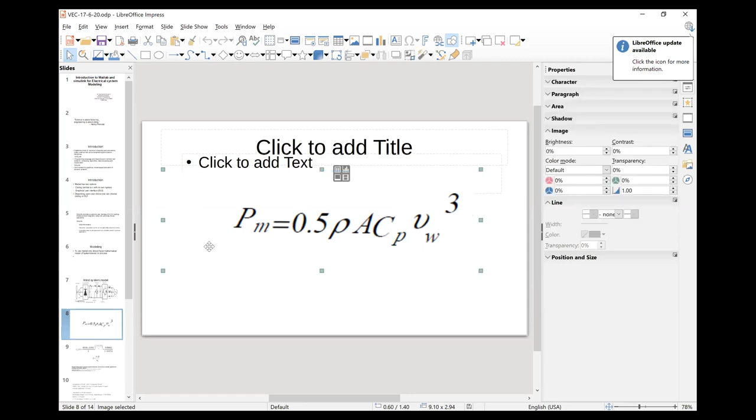See, this is the equation for your wind turbine. The power output from a wind turbine, PM, can be written by this equation: 0.5 rho A Cp Vw cube. Rho is the air density, A is the swept area, Cp is the Betz constant or limit, generally given for a particular wind turbine, and Vw is the wind speed. This equation gives the power output of a particular wind turbine. We need to implement this in MATLAB.

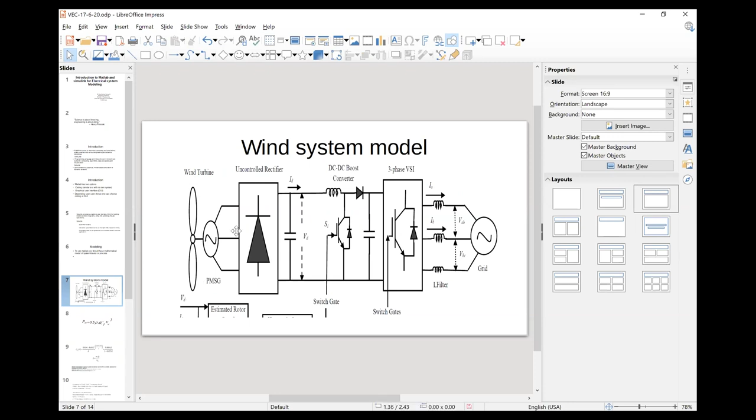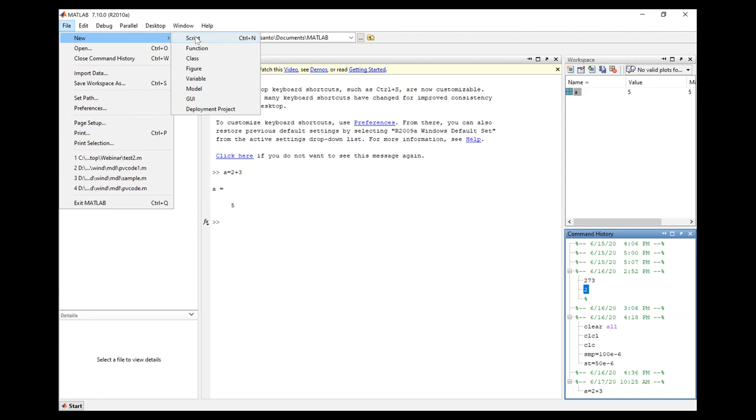Okay. Now I'll just open here. If you go to the MATLAB main window and click File, you can see New Script. There you can write code so that it can be executed. After that, if you open the Simulink browser as I showed you earlier and click on File, or click on this button, you will get a new model. It will open a new window where you can easily implement your model.

Okay. Now it is half rho A V cube. Half is a constant, so you can go to the commonly used blocks. There you can find the constant. Here is the constant. Now rho is also a constant, because for a particular area the air density is common, so that also I will take. You can take it from here, or you can right click with your mouse and drag it, and it becomes a duplicate.

Now half rho A V cube. V cube is a variable, so as of now I am not going to make it a constant. First is the half, so I will make it a constant. I'll take the constant block, double click on it, and you will see the constant value. Make it 0.5. It becomes half.

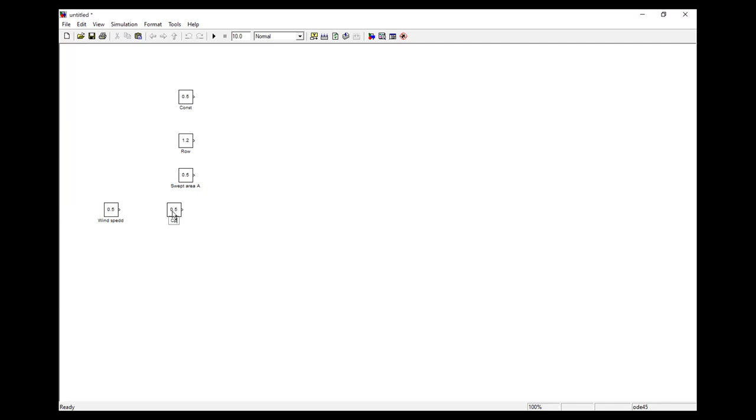Okay, now all these are multiplied. So you can find multiplication here, or you can go directly to the math operations. Either way, generally, if you are using a model frequently, it will be shown in your commonly used blocks. Otherwise, go to the particular tab and you will find all the other options. So math operations, and just try product.

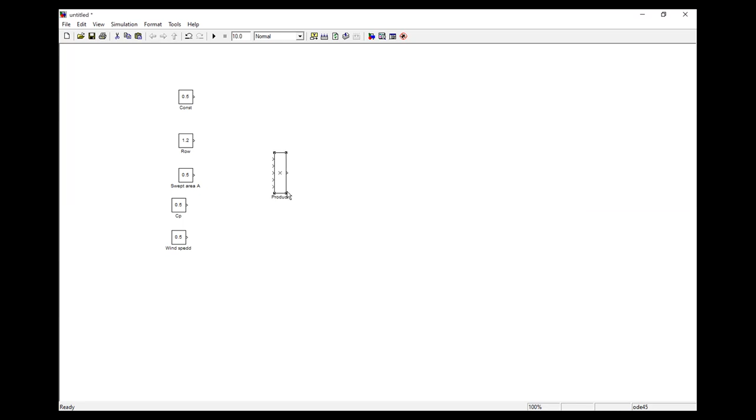Okay. See here, we have 1, 2, 3, 4, 5 elements. I need to multiply all of them, but here you have 2. But you can change that. You just double click and you can change the number of inputs you require. So I'll make it 5. So now you have these. Okay, to connect, you just click and hold your mouse button on the output of that constant and just connect.

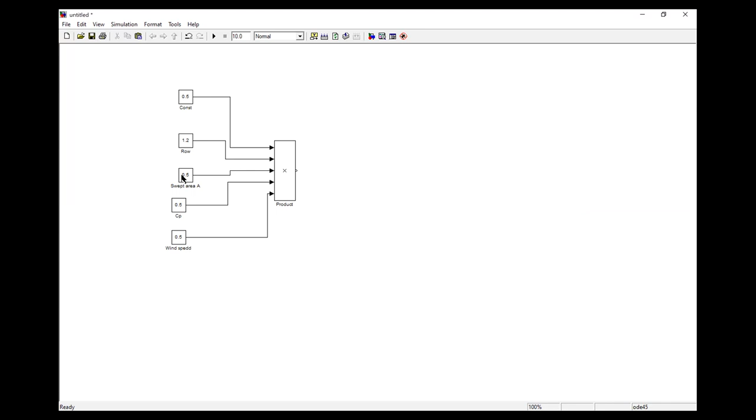Okay, for swept area, generally most papers will give the diameter or the radius. So if you compute pi r squared, you will get the total swept area. For the time being, I'll just give 10 square meters as the swept area. The range of wind speed is mostly given from 4 to 12 meters per second, so I'll take 9 meters per second.

Okay. Now this is the equation: Pm is equal to half rho A Cp v cubed. See here, the wind speed I have shown is directly connected, but it should be cubed. We need to make it a cube. So go for math operations. Okay, let's take this one. Sometimes if you just place a block in between the lines, it will be connected automatically. You need not delete anything; just drag it and place it on the line.

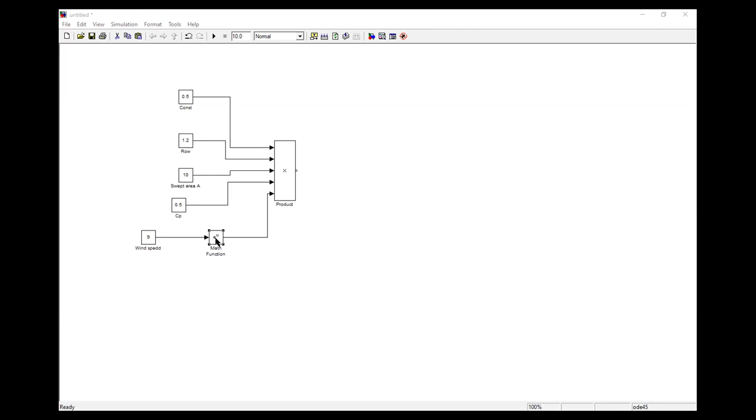If you go to math operations, there are a number of options: power, exponential, log, 10 to the u, magnitude, square, conjugate, reciprocal. Whatever is required, you can use. Now I will go for the power. Here two inputs will come: u is your base, v is your power. One I have already given as u, the base value. I'll take the cube because we require v cubed, so I'll make it 3.

Okay, this output becomes v cubed. Now the equation I showed you is built here. If you want to see the outputs, go to the sinks. Commonly used blocks and math operations are generally used. To see the output, go to sinks, where different sinks are available: display, scope, to workspace. I'll put the display and I'll put the scope also.

And always remember, whenever using the scope, double click on the scope. There are two options. Always click parameters here. One is general, where you can change the axes. If you require three inputs to be seen at a time, you can change the number of axes. The others you need not worry about.

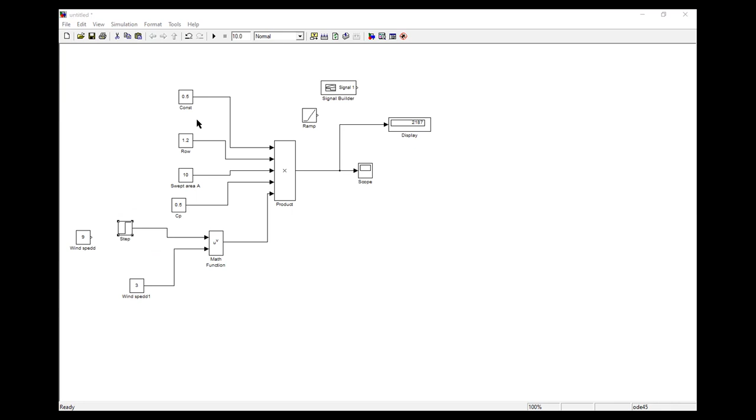Just now I disconnect it and I'll put a step. I just want to show how to use a step input. See here, if you double click on the step, you have parameters: step time, initial value, final value. Step time means after what time your initial value goes to the final value. I'll give 5 seconds. Initial value is 5 meter per second. Final value is 12 meter per second.

So initially, here you can see 5. After 5 seconds, you will see 12. That means 5 meter per second for the first 5 seconds. After that, the output will be changed to 12. So this is the step input, how you can use it. Okay. And now here you can see the 12.

I'll just click OK. Now, what is the difference between display and scope? I want to show you. I'll run. See, in your display, you are seeing the last number. After stopping the simulation, you can see the number. In your scope, you can see the complete section. Now you can see the screen, the scope. Yes, sir. See here, the whole simulation time is shown from 0 to 10 seconds.

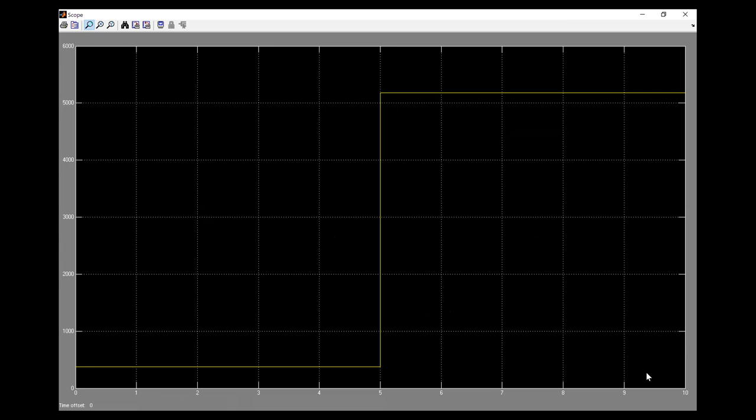It is 5 meter per second. After that, from 5 seconds, we changed it to 12. So the complete simulation time output can be seen in the scope, but in your display only the last value will be seen, or as the simulation is going on, you can see the change in the values. So this is the difference between the scope and the display. If you want to see the final value, you need not put the scope, directly go for the display. But if you want to see the whole changes in the simulation time, then you have to go for the scope.

And remember one thing, if you keep on increasing the scopes in your simulation diagram, the memory becomes larger and larger. Sometimes your MATLAB may stop working because of memory overflow. So try to have as few scopes as possible. If you have a very good configuration for your MATLAB, then need not worry. You can go with any number of scopes. If you have limited memory in your system, then try to have a minimum number of scopes. Okay.

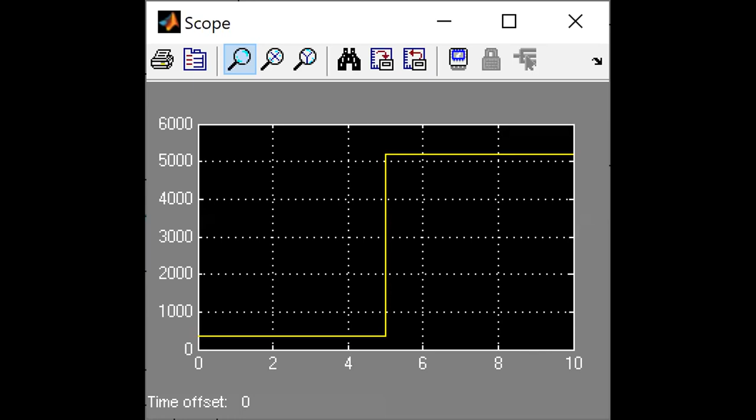So here, you can see the screen, your scope. I used the ramp function where, if you give the values, it will start from 0 and increase. It is taken as wind speed. You can have your own model for wind speed, that's a different case. For the time being, I've just taken the ramp signal, which changes from 0 to 12 meters per second in 10 seconds. So we can use this one for the output. So, how this output will look. Okay.

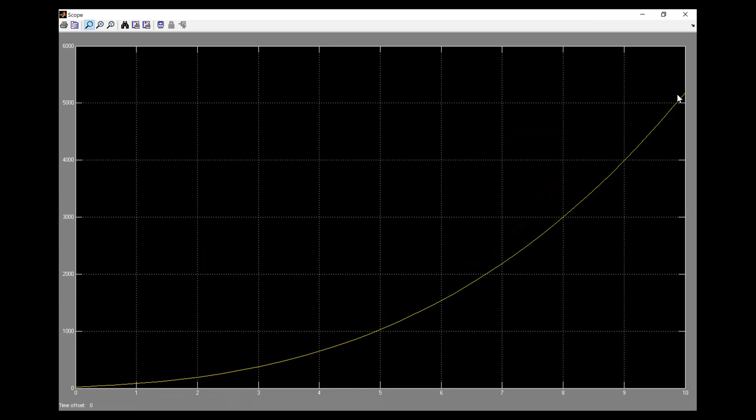See, it is just an example. It's not that you have to use this exact method. There are many models to make the wind speed models, you can use those also. So these are the two ways how you can use wind speed.

Okay, just using the signal builder, you need not worry, I'll show you. You can use it similarly, you can have at what particular time what wind speed can be changed, or any input. It is not only for wind speed, if you are going for PV systems, you can change the irradiance also, so you can change it as needed.

See, what you are seeing on the screen is the signal builder. Here you can put the time scale, you can have any number of seconds or minutes. You can take it and change the values as per your requirement.

Here, ramp is like that, it goes in a straight line. Here you can have steps or whatever possible way you can make it. Okay, so for that you need to change it.

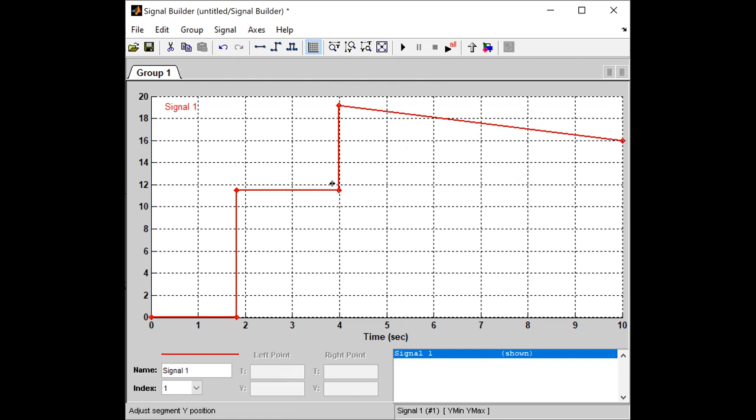Just I need to change the axis. Now, if you have that one, just change it as per your requirement. Any possible positions you can take. So this is one way you can have the signal, of course. Otherwise, you can go for the step function, which is generally useful.

Now, as I told you, this is just a wind turbine model, but we have not used Cp as the direct value. Cp also has to be developed as a model, as I've shown you. This is given, and of course I will not read out these two equations, but I need to implement them in your system. Okay, let me explain.

60.04 minus 4.69 lambda, divided by lambda. This is one part, see here, this is one part, this is another part. So there are three parts. So if you see any equations, try to divide them into parts, it is easy to implement.

So the next one is e to the power of minus 21 plus 0.735 lambda, divided by lambda, this is another one. The next part is 0.0068 lambda divided by 1 minus 0.035 lambda. These three parts become your Cp.

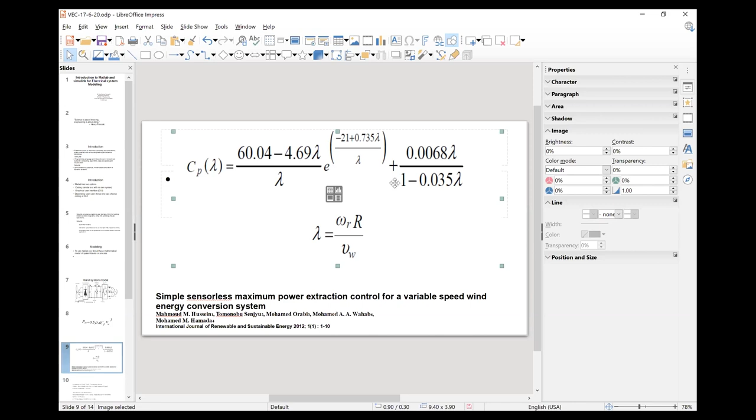Then lambda is defined by omega r divided by v, that means your wind speed. These are the equations, I'll try to show you how to implement them.

So this is one way. Here, if you have many blocks to be combined, what you have to do is make a subsystem. I'll remove this ramp for now because we don't require it.

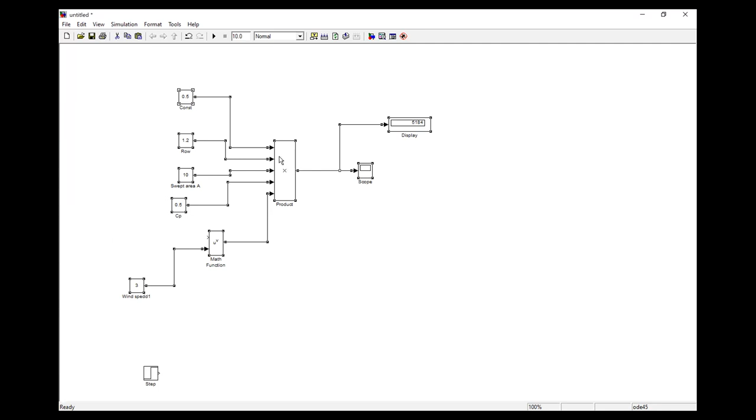Okay, now what I will do is select all the blocks you want to make into a subsystem. So you select all these blocks, right click on that, and create a subsystem. So it becomes a wind turbine model.

Now here, see, when you're doing this, if you don't keep any constant or input for any value, it inbuilt takes it as an in or out. Here I should have removed the scope, then you could have seen it, so I'll just show you. See, if you don't keep anything here, it becomes input. If you remove the scope, it becomes the output.

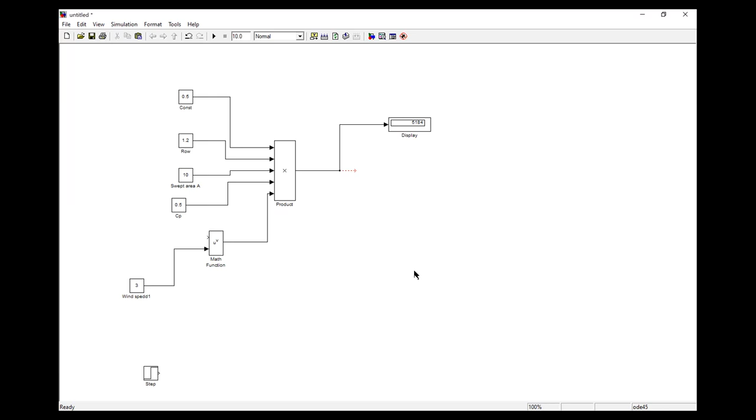Okay, if you select it again and go for create subsystem, you have got two things: one is the input, your wind speed, and the output is your power.

Now, as I told you, I'll try to implement your Cp. Cp again, first one is your constant, or otherwise I'll just show you. I already have files, so not to waste time, I'll just show you the direct file.

Not to waste time showing how to implement it, I already implemented it, I'll just show you. So here, this was the power equations. There are two ways to implement your equations. One, as I told you, this is the power equations, I have implemented using this one.

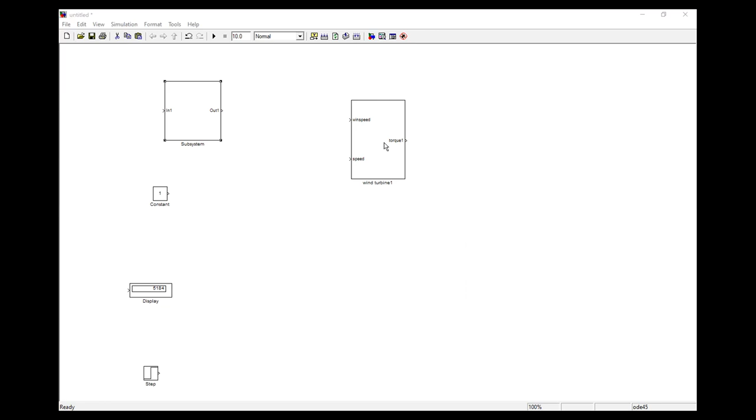This is your Simulink block, the same block, this complete block is implemented using this function. That means you need not go for the block, you can write the functions also. See here, for example, Cp, what I told you, they have given the values for C1, C2, C3. If you go for any reference book, Cp is defined by all these values. So that equation has been implemented and the Cp value has been taken here.

If you remember the equation, you have wind speed, air density, diameter—that means your swept area—and Cp. For Cp, you have a lambda. Lambda is nothing but your omega r divided by V, that means your turbine speed multiplied by the radius of your wind turbine divided by wind speed.

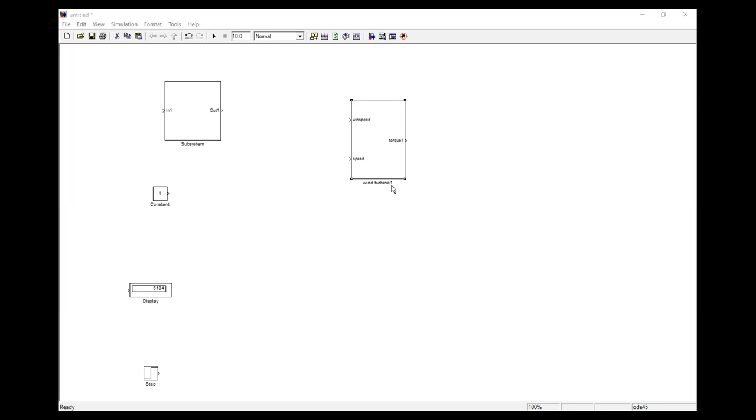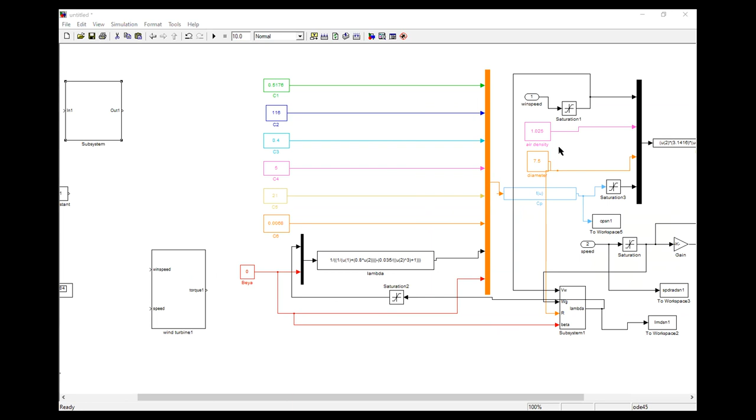I was supposed to show you how to implement every block, but we are running out of time, so let me just show you how that was done. This equation and whatever you have done in the subsystem are both the same. As you keep using MATLAB, you'll come to know different ways to implement it. This whole equation has been implemented using a function, where you can write it as good as a handwritten equation, rather than going for a very elaborate Simulink model.

So here constant, all these things are taken in this function. This is the simplest way. As I told you, Cp is the value—this is the different equation I'm showing. Cp is defined by C1, C2, and all these values will be given. You cannot derive these values yourself; the manufacturer of the wind turbine will provide them, or you can get them from reference papers. So these values, and Cp, are implemented using the function.

If you go for the Simulink block like I previously showed, it is very convenient compared to this. Cp is also implemented in terms of lambda, which is omega r divided by V—that is also implemented here. So all these values are given to get your power requirement. Once you run it, you can get the power output from the wind turbine model.

Now I will show you another approach. This is the complete Simulink model. You can implement the whole system in code also, which I will show you. The same equation—Cp, your power equation—is written in code using the values I shown you.

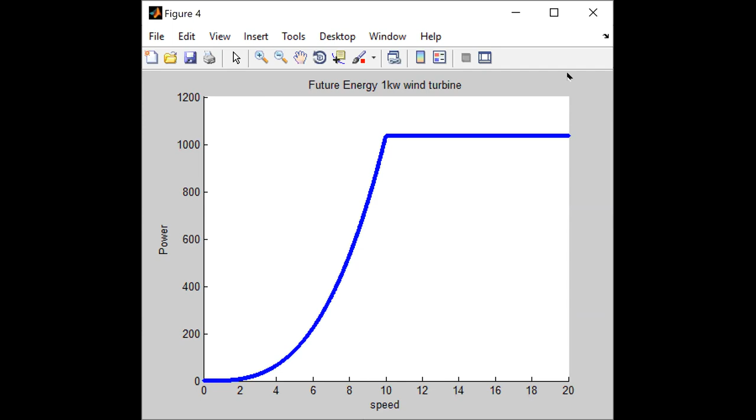This is the code, and that is the Simulink implementation. This is your power, this is the Cp value, and the output power is taken. I think you remember, power divided by speed gives you the torque. So once you build the wind turbine model, next it goes to your PMSG system.

You see here—still, can you see the screen or not? What I have shown is a wind turbine model, which is a subsystem. From that output, you are going to get the torque. So from the wind turbine model you get the power, and if you give feedback of the speed from the generator, it becomes the torque. So here I have given the PMSG.

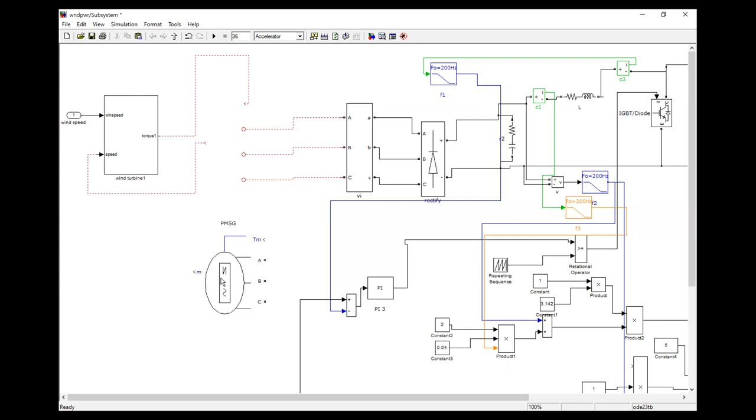This is your PMSG. I'll just try to connect it. Okay, so we have a PMSG here. There are different DFIGs also available, but I have taken PMSG.

In PMSG, if you double click on it, there are different ways to configure the parameters. If you go to the parameters, stator phase resistance, inductance, flux linkage—all this has to be with you, otherwise you may not get the required value. For this reason, you need to refer to a standard paper; they will give all these values, so you need not worry.

If you take a particular 50 kilowatt wind PMSG generator, many papers will give the resistance, inductance, LD, LQ, flux linkage—all these values will be available, and you need to insert those values here. Otherwise, you need to design your own kilowatt-wise PMSG and derive all these values yourself, or else select a particular generator of your requirement and use those values.

Another thing—for any generator, if you use negative feed, that means minus torque, it acts as a generator; positive torque means it's a motor. So this PMSG is not just a generator, it's a synchronous machine you can use. If you go for any machine in the SimPowerSystems, giving negative torque makes it a generator, positive torque makes it a motor. Try to remember that. So after the generator, we are going for the rectifier.

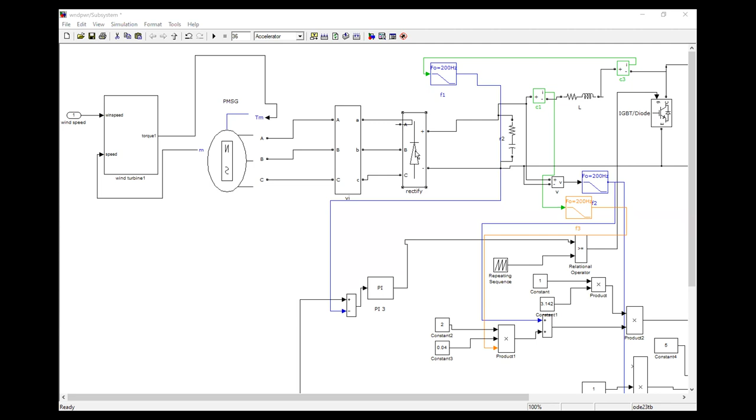After the rectifier, I have connected a boost converter. Don't worry about this part - it's actually the control part, which again takes an hour to explain. I will not go through how to control the boost converter; I'll just show you how that model has been implemented.

After the rectifier, I have kept a small filter, and after this is the inductor - you can simply use an inductor. If you take the element from your SimPowerSystems block, you can have R, RL, RLC combinations also. You can go for the L. Here I have given the default, or you can calculate it using the cutoff frequency and go for the L values.

This is the IGBT. So here, this was the bridge, and this was the single element - this becomes this part. This complete part becomes your boost converter, and this boost converter is connected to an inverter system.

Now I will show you one where a wind turbine is connected to the grid system, as I was telling. Here we have all the components: wind turbine, PMSG - in this block, PMSG as a subsystem block, as I've shown in the separate screen. There, all the screens combined become the wind system.

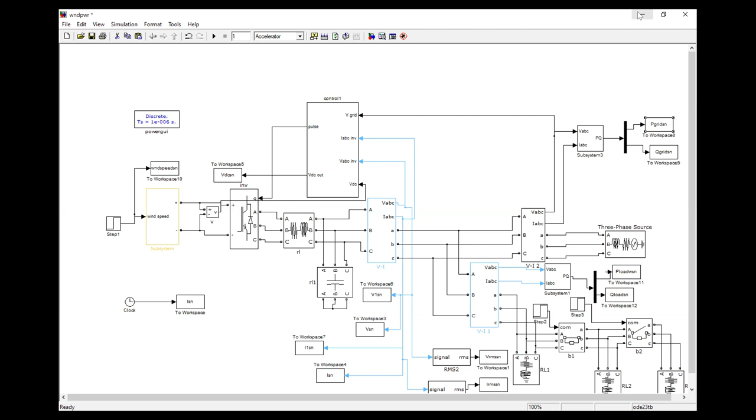And I would like to inform one more piece of information to all the participants. We are going to conduct a 1-week faculty development program also on emerging trends and challenges in electrical engineering, which will be held from 22nd to 27th June 2020. The timing of the faculty development program is in the evening, from 4 p.m. to 6 p.m. And this is going to be organized by the Department of Electrical and Electronics Engineering.